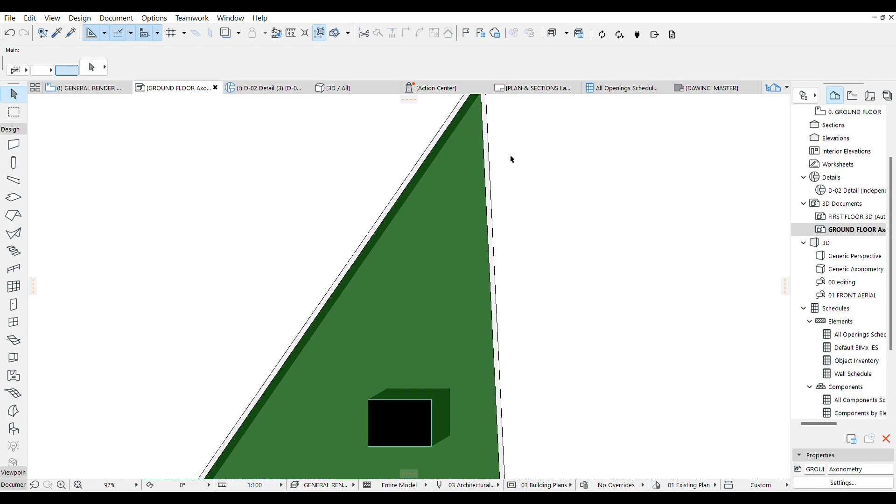Then going to the last example, you see things get even worse and worse. The square footage is actually the same, but the shape of the land has changed a lot, so we cannot have a lot of functional parking area and basically things like that. You can see we have literally a lot of space at the back of the plot, but there's not much you can do with it. You can't even put a house here for the maids or something, because everything is literally irregular.

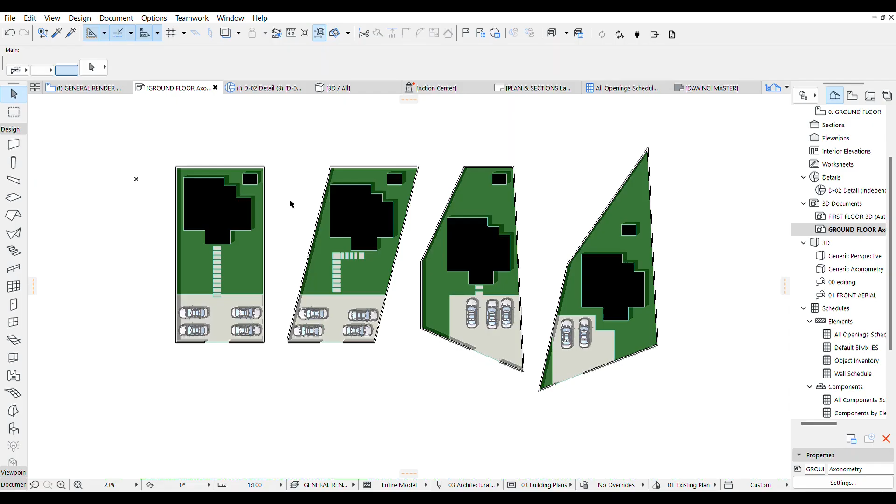So let me give you this live example. Just like you can see on my screen, we have literally 4 plots. If you measure them in terms of square footage, they are all 12.5 decimals, but you can see since they are different shapes, when you're designing for areas like this, the shape of the land is a very big factor in how the space is actually being utilized.

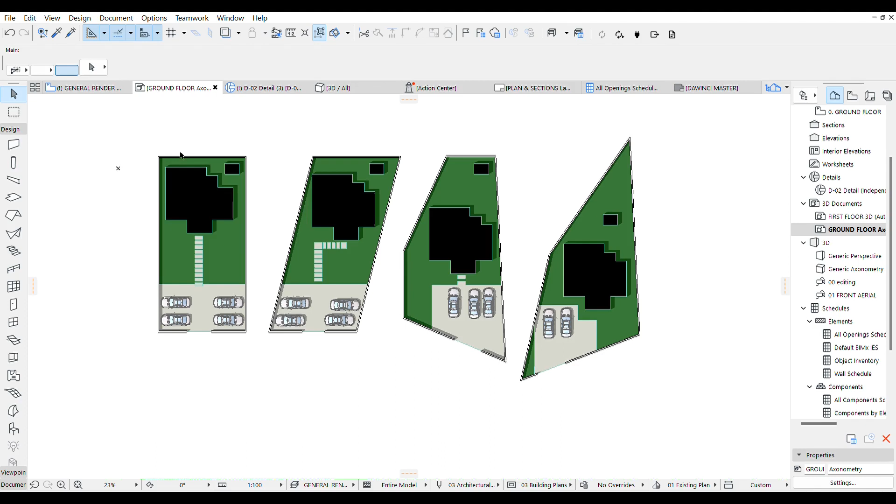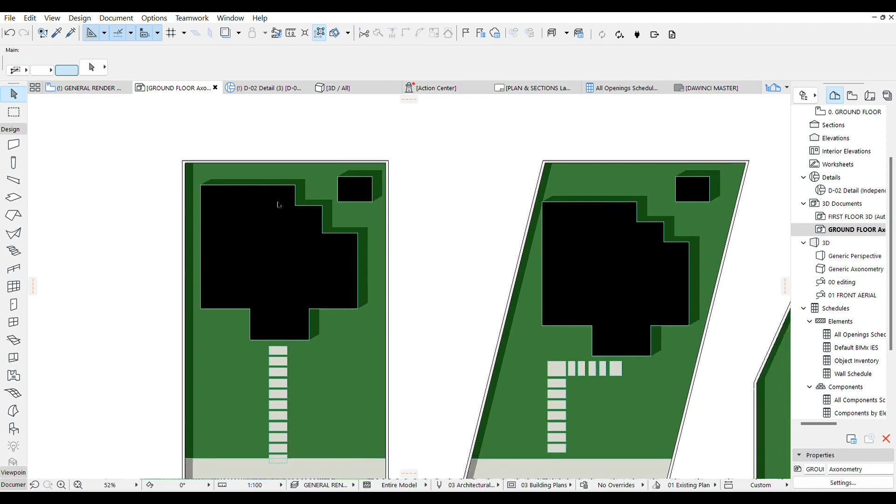So we are going to start from the first one and go towards the last one and see what advantages we have. If I zoom into this first one, we have about 50 feet here, and 100 feet here, that is 15 meters by 30 meters. You can see we literally have parking for about 4 cars, a good compound, and fairly enough space at the back that we can use for a tank stand. We have a regular shape compound where you can have parties, and cars can easily navigate from the compound and reverse to the outside. This is literally the entrance.

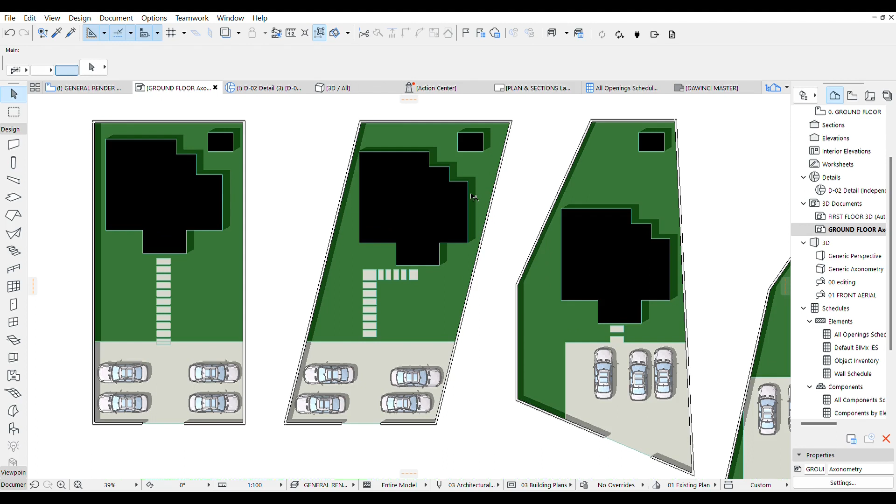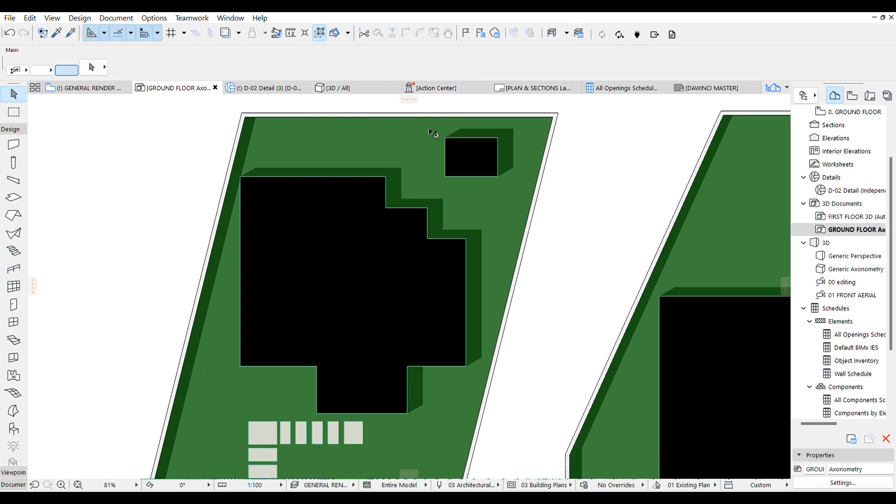Going on to the next example, the plot is actually the same size, but it's sheared, so it's kind of a parallelogram. We are using the same house, not that houses literally have to be this size or shape, but we're using it for illustration purposes. You can see it has comfortably sat here, but the edges are almost knocking the edges of the plot. We have some space here, but it's triangular and there's not much you can do with it, though we can still have a tank stand there.

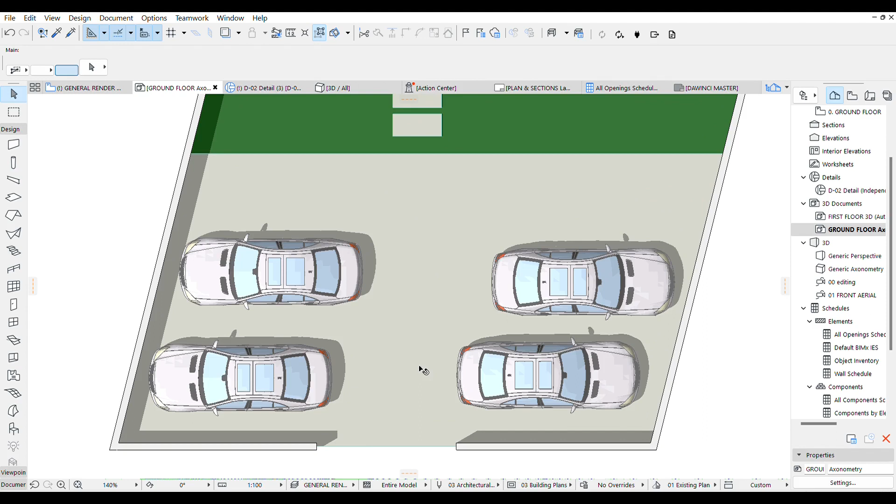Then you can see the compound itself has reduced in terms of size and orientation, as opposed to the first one which is big and regular. Then the parking - however much you put 4 cars here, the navigation is not that comfortable because the space between cars has reduced. In this scenario where we have 5 meters, here we have about 4.5, 4.3 meters. It may not be comfortable for a guy parked here to easily reverse out of the gate without making multiple turns before comfortably using the road. Going to the next plot, it gets even worse.

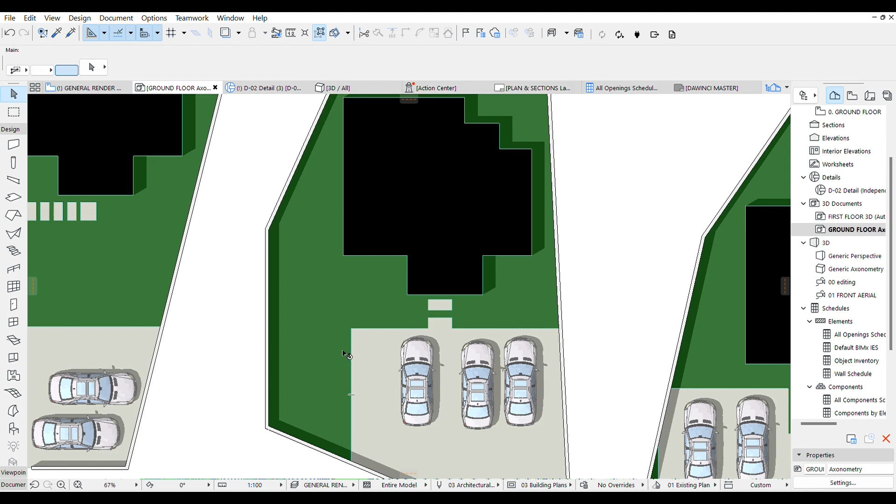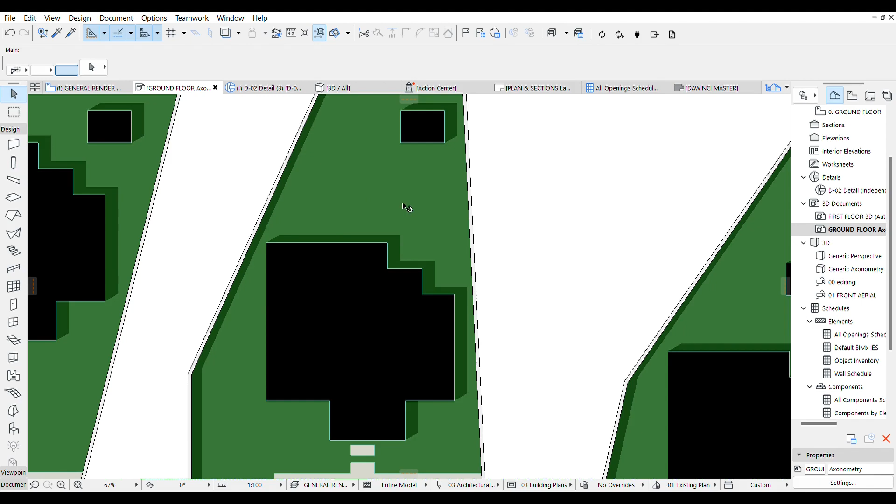You see the compound is there, the same size in terms of square footage, but because it's scattered all over, it's difficult to hold a function there or have functional greenery in this area. Because we already have a lot of space left at the back of the house, if we push this building to the back, it will knock the edge here and not fit comfortably. This can be countered by choosing a different shape of house that fits here, but you'll be having a lot of corners on the house, which in the long run in terms of construction can still cost you a lot and might not 100% solve the issue of having a regular compound.

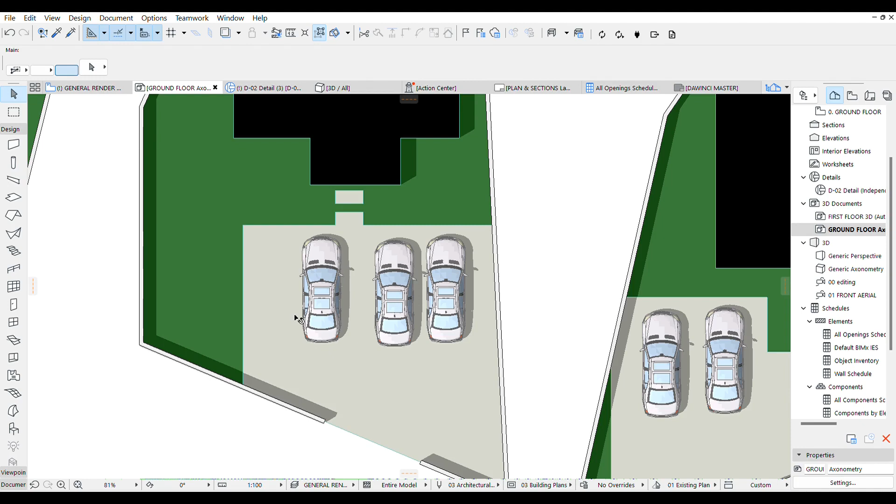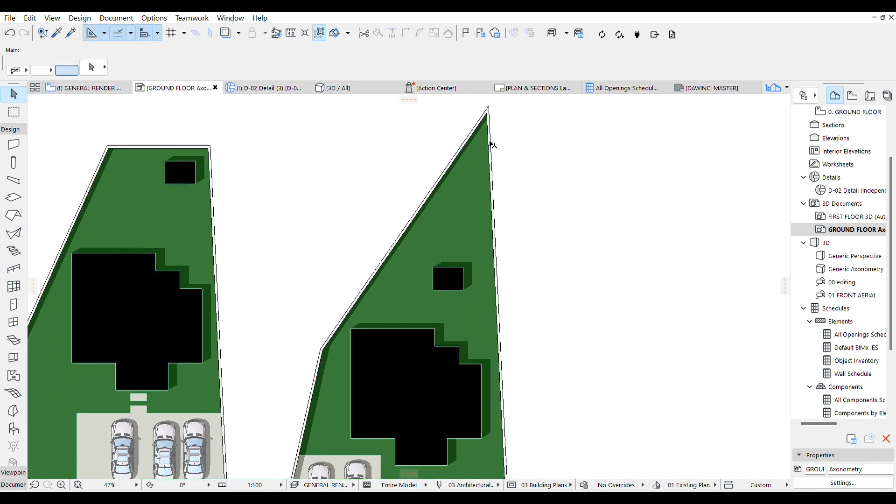You can see we can only comfortably have 3 cars here. We could have another car here, but the navigation of how the car reverses to pass through the gate or navigate in the compound becomes even more difficult. Then going to the last example, things get even worse. The square footage is the same, but the shape of the land has changed a lot, so we cannot have much functional parking area. You can see we have a lot of space at the back of the plot, but there's not much you can do with it. You can't even put a house here for the maids or something, because the plot is irregular. So that is very important.

And then the second issue that you need to think about when you're actually talking about the land is the terrain of the land. So unless you are really willing to spend like a very wealthy man, it is important that you avoid lands that are very, very steep.

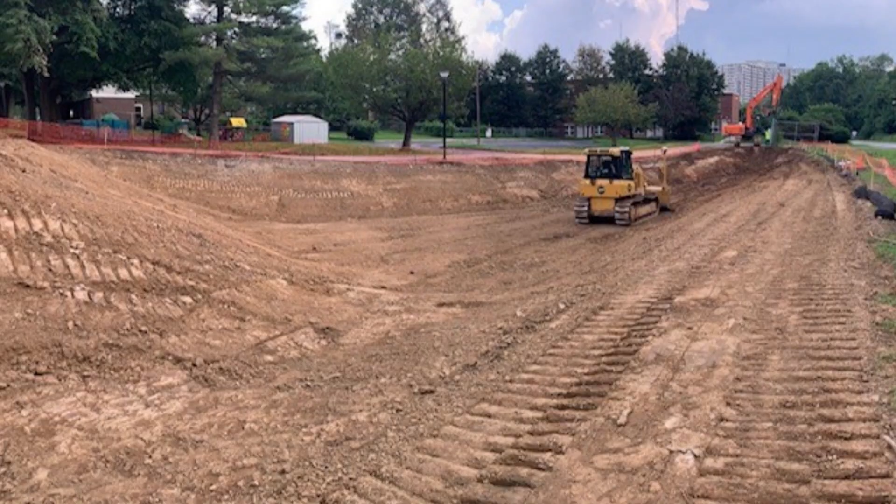Because if you have a land that is very steep, on a hill, just the amount of money that you put in building those retaining walls, planning for the drainage, doing the excavations and leveling and grading it—by the time you have a standard 50 by 100 or 100 by 100, just grading the land and building the retaining wall to have the structure ready, you're already close to 30 million worth of money. You haven't even done anything on the ground regarding the house.

So it's very important, if you're choosing land, you're better off choosing fairly flat land. I know the broker is going to tell you, you have a very nice view of the estates, a nice view of the valley, but remember, to reach up to that, there's a huge amount of money that goes into planning for that, and also a huge amount of money that goes into actualizing it, until you begin construction and you see a lot of money going into grading and retaining walls, and the building is not yet up.

That's very sensitive. So when you're going to buy land, if you're on a budget, it is important that you choose land that is fairly flat. That will save you a lot of money in construction than if you have land that is very, very hilly. So there are many more issues to discuss.

Of course, after you have the land in place, I'm not going to go into the legal aspects of verifying that the land is in proper channels, because there are scenarios where people begin construction and then someone comes claiming the land was falsely sold, that you were defrauded and things like that. But that is not my part to discuss—that's for the lawyers.

But now, after all that has been selected, there are many more things to do with the plan. And so in the next video, we are going to be discussing the next step, which is having the proper building plans for the house.

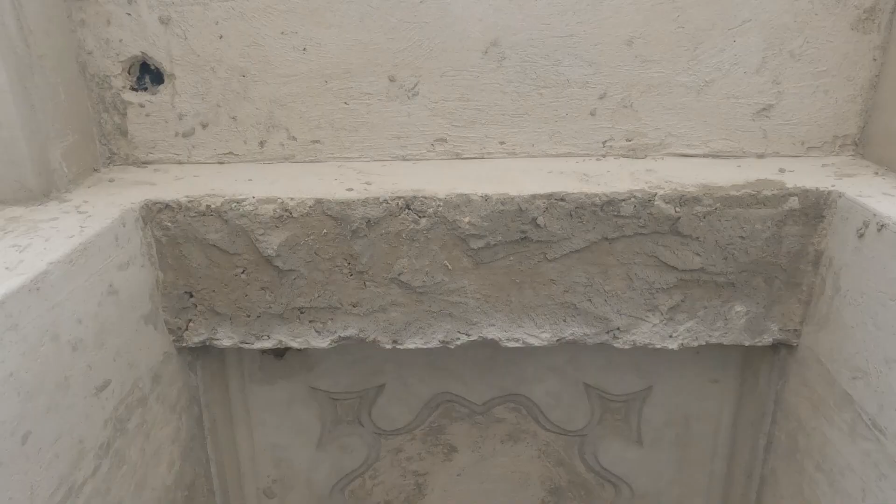Because I've seen people having building plans here and there, and then when you begin to construct, someone literally raises the shell of the building, then gets someone to do the finishing, with no idea of how the house is supposed to look at the end of the day. This is one of the most interesting things I've come across in the construction industry—someone just raises the shell of the house, and then says now it's time to beautify the house. But beauty does not just come from the finishing, it comes from the design as well.

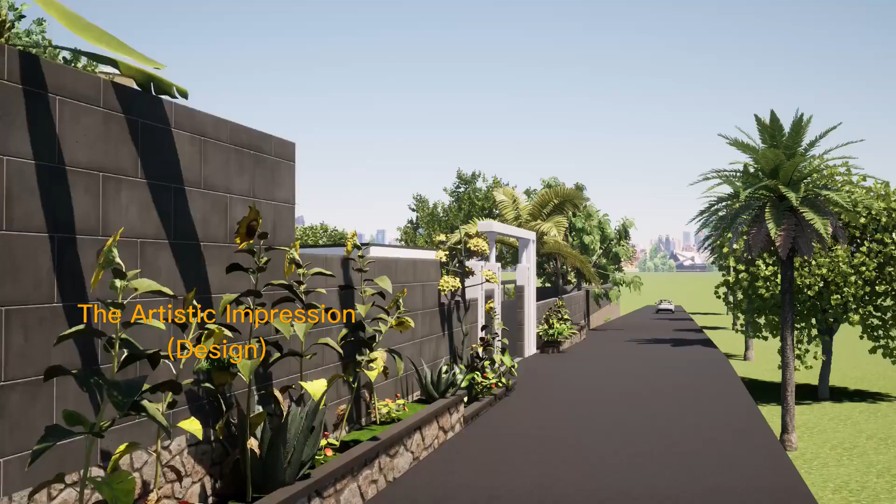So it's important when you're having the architecture design, the design of the house, you must have a clear picture of what the house is going to look like at the end of the day. You must have a clear artistic impression of how the house is meant to be. Even the artisans, craftsmen, builders and masons doing it—it acts as a guiding light for people to follow, to have a vision of the end of the building before they even start the construction.

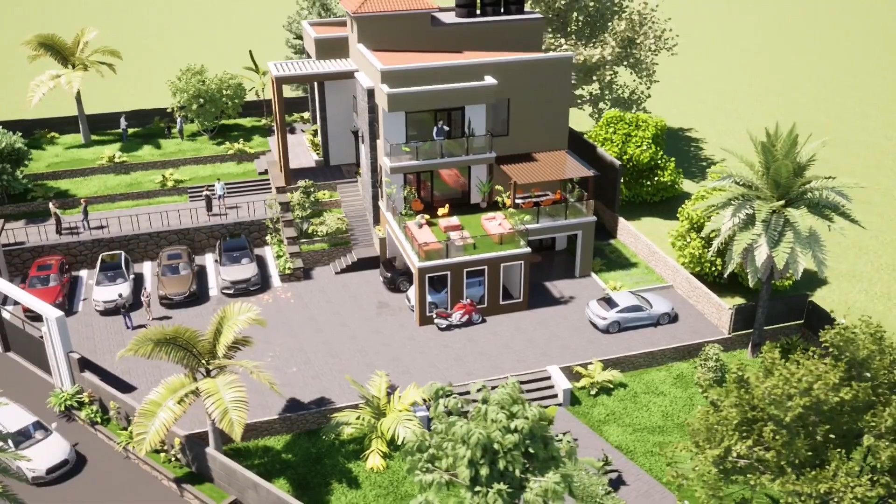Okay guys, this is very, very important. Anyway, I'm not going to waste a lot of time on that, but in the next videos we're going to be discussing everything in detail, including the different materials you need to choose, why certain materials and why not others, and also a lot of narratives that have prevailed over a long period of time. These are narratives like things to do with DPC, things to do with hardcore, because some of these things are not really needed in certain areas, but because that's how it has been done before, people still carry it on without questioning whether it's really necessary. So some people end up spending a lot more money than they should, just because they're doing something that has been done over and over again. We are going to be discussing all these things in detail.